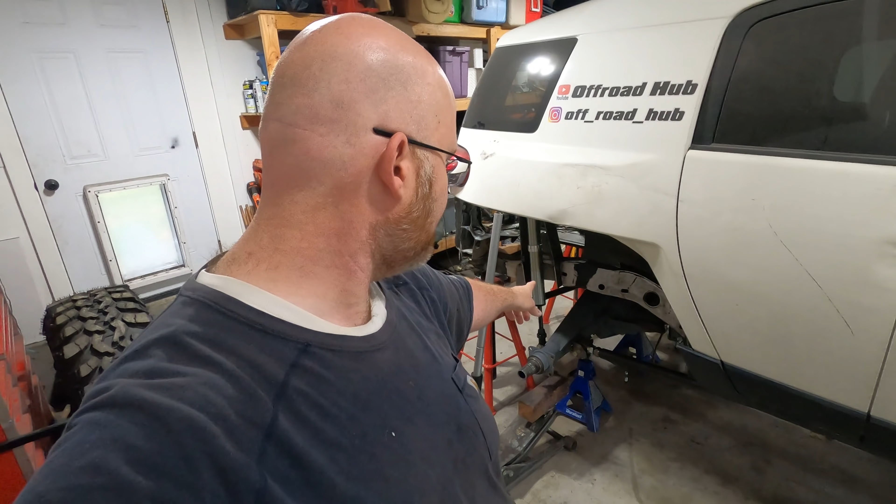And then also, here are my new oil lines. When we get done with the main thing I'm gonna talk about today, we'll talk about those oil lines, and I'll show you my rear axle. It's now movable, it's off the jack stands. Well, it's on the jack stands right now, but we can take it off the jack stands and I'll show you how it moves.

So I've covered a lot before about my snorkel and the issues that I had with the ARB Safari snorkel. I put these big holes in the fender, and it kind of dented up my fender because I dragged it and hit it on things. Anyways, the intake is right here behind this hole. So this is the factory intake that I reinstalled. If you look up in here, you can see that's where all the air goes in.

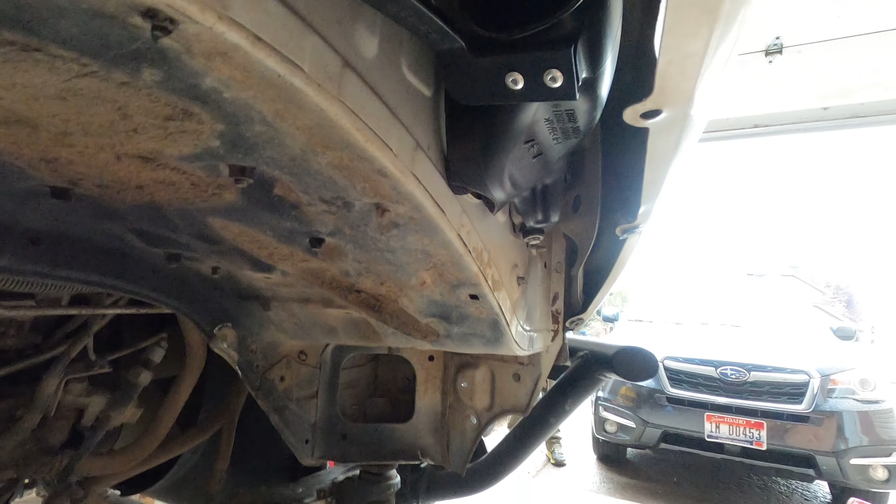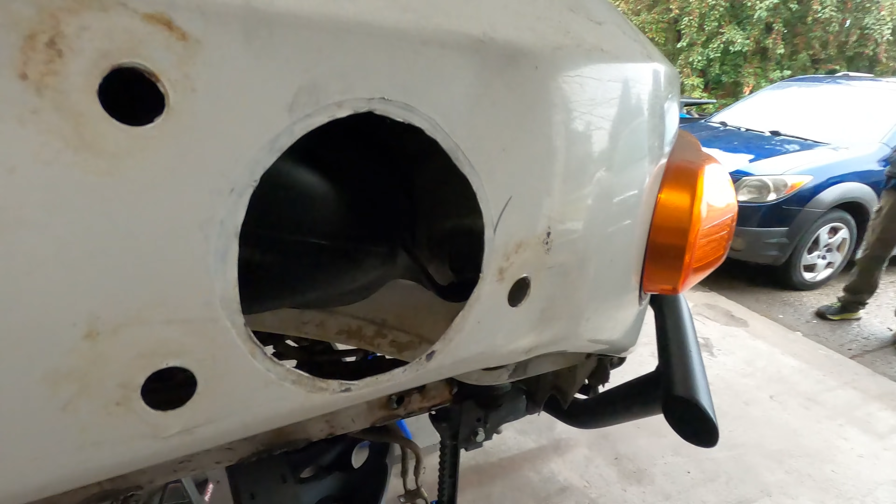With my solid axle swap, I'm not going to have any plastic liner here, so all the dirt and mud is going to go right up here directly into the intake. So that is not going to work. So I've been thinking about and trying to figure out what I want to do for an air intake. I didn't want to put on the Safari snorkel again just because I don't like how it's out here on the outside of the fender. It just seems to get in the way too much.

So I went on eBay and I've got this box that came all the way from Kazakhstan. This is one of those low profile snorkels that goes under the fender and then up on top of the roof here. So yeah, let's open up this box and see what we got from Kazakhstan.

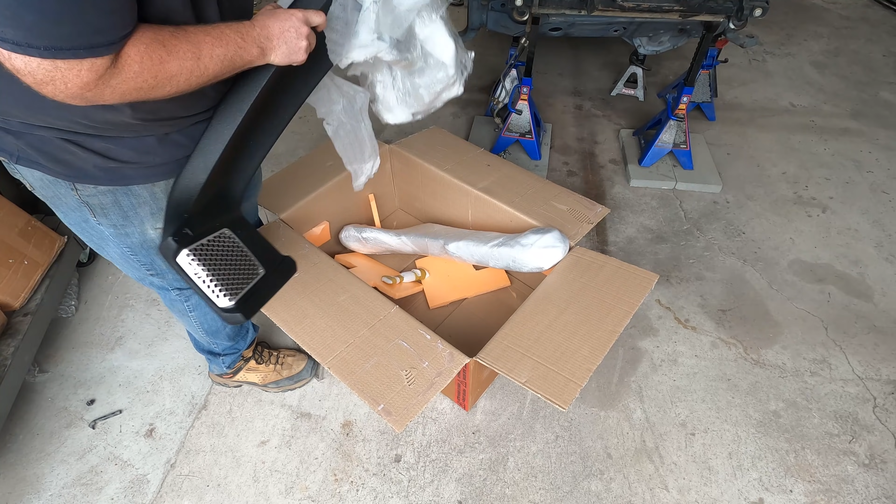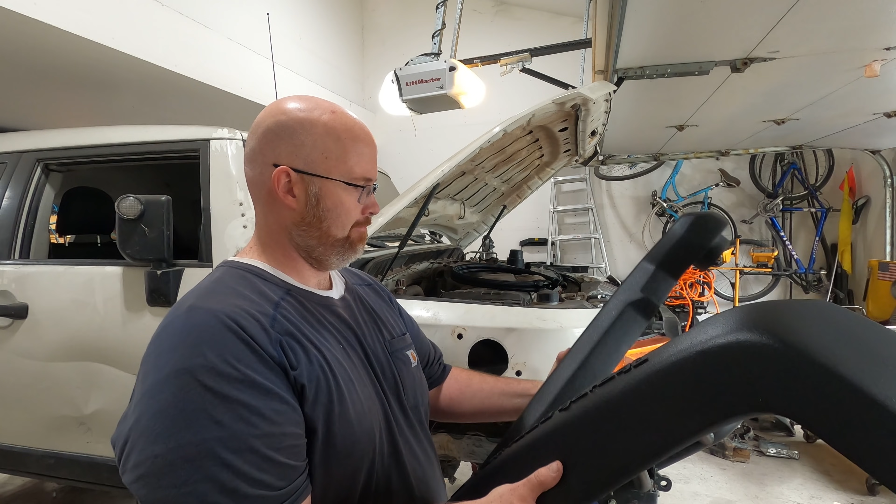So there's not much in the box, just these 2 big plastic pieces. The piece that goes under the fender here, and then the piece that goes up on the roof. And they've got their company name here on this piece. It's called Offroad Garage. So yeah, this is the Offroad Garage snorkel. They're not called Offroad Garage on eBay, I'll have to look and see what their name was on eBay. It wasn't that, but yeah, Offroad Garage.

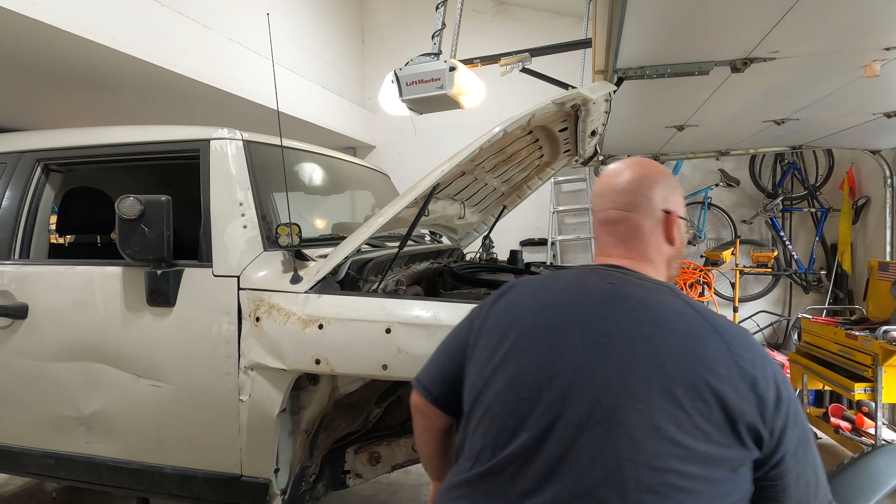Other than that, the only thing that came in the box was this hardware kit with this bracket and some screws and washers and stuff. No instructions. I'll have to go online and see if there are some instructions. It's probably pretty self-explanatory, but I gotta see if there's some instructions.

All right, I don't have any instructions to print out, but we found them online, so we'll just look at the laptop and reference that as we tear into this thing.

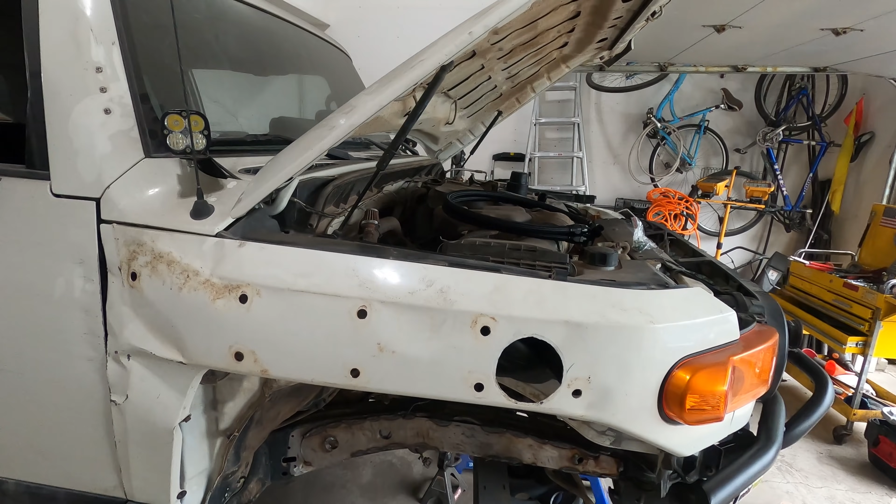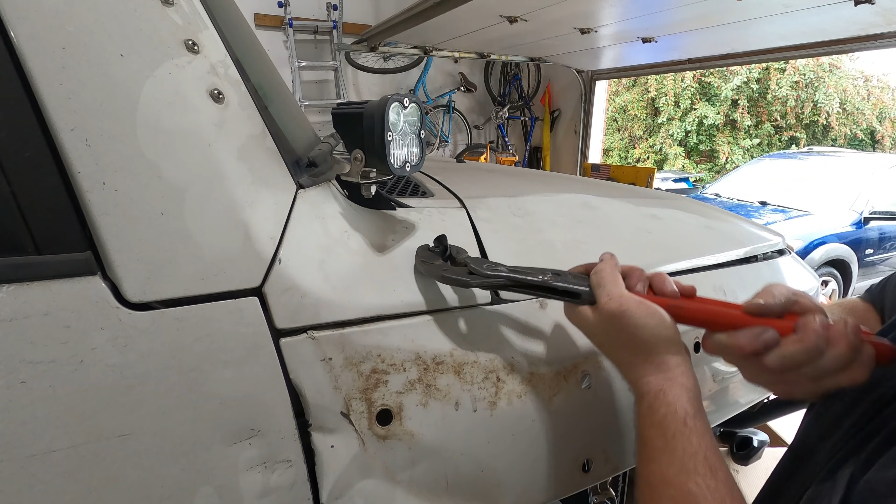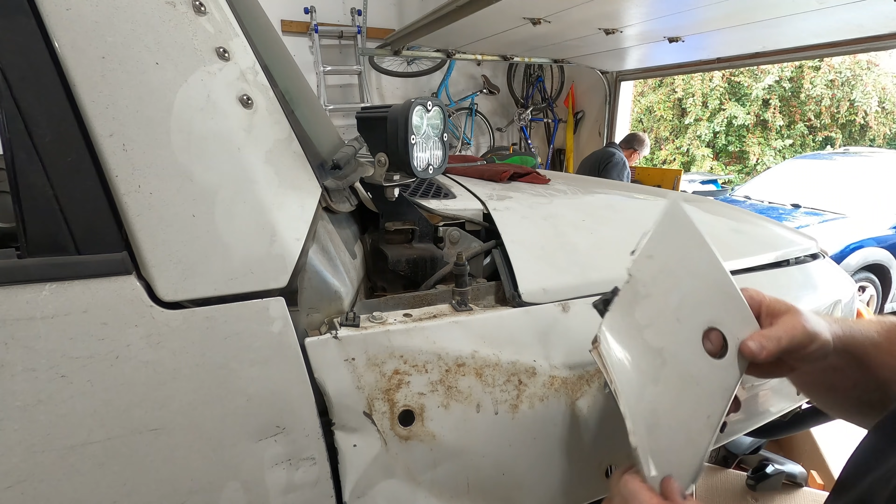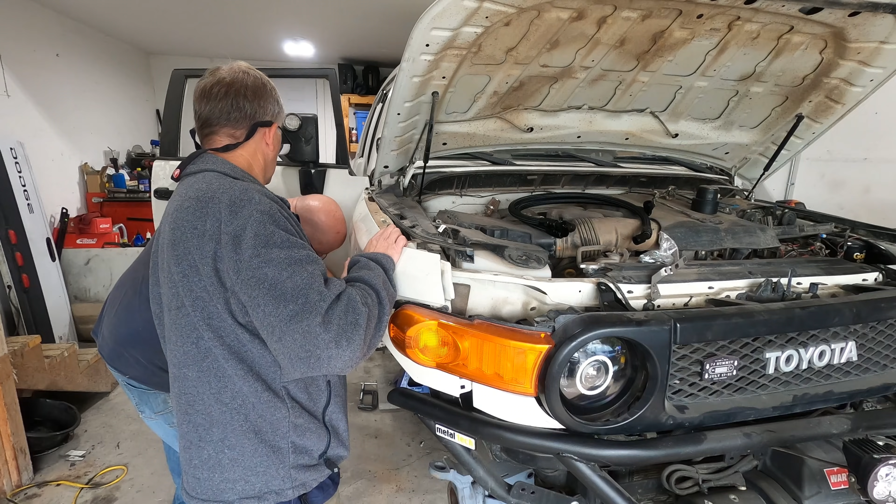So I gotta get this antenna out of the way, and then I'm gonna have to take this panel off, and hopefully I don't need those clips that hold this panel on, because you know those are gonna break. Oh, big surprise, my antenna's not totally straight. I think this thing just pops off here. With some difficulty... there we go. Those are really stuck on. These plastic clips - this one didn't break, and this one did, and these ones did as well. I don't know if I'm going to be reusing those or not though, we'll see.

There it is, so now you can see even better. Here's the intake, and the wheel's going to be right down here, so that's obviously not good. All right, so when you order a snorkel from Kazakhstan, you don't get really any instructions. It's pretty terrible instructions.

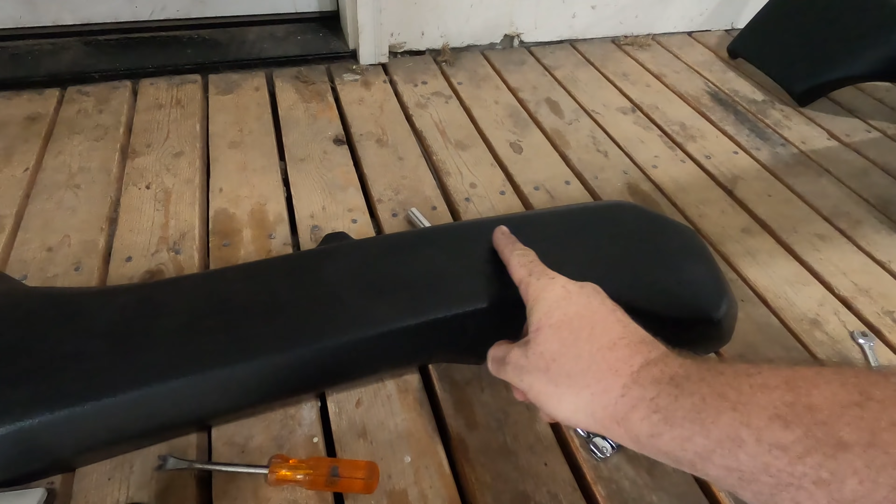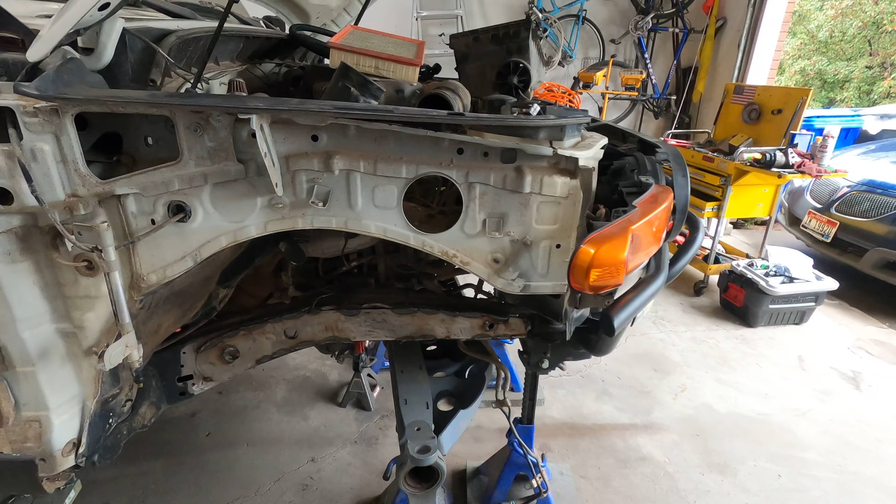We got to drill some holes in this somewhere and put these brackets onto that, and then bolt those brackets up to here somewhere. I need to remove this. It doesn't say to do that, but it's obviously in the way. So this is supposed to, let me see here. Trying to hold the camera and the snorkel at the same time. This is supposed to go up here like this, but this little piece of metal right there is in the way. And then we got to try to figure out how to get it bolted up there with the little brackets they provided.

The instructions just say apply sealant to junction connector and inlet air openings. It has little arrows and stuff, but it doesn't actually show you where they go. And the instructions seem to be translated from Russian, and they're not very detailed at that. But we're gonna figure this out. I think we're gonna remove this and then just kind of engineer this and figure out how to make it fit.

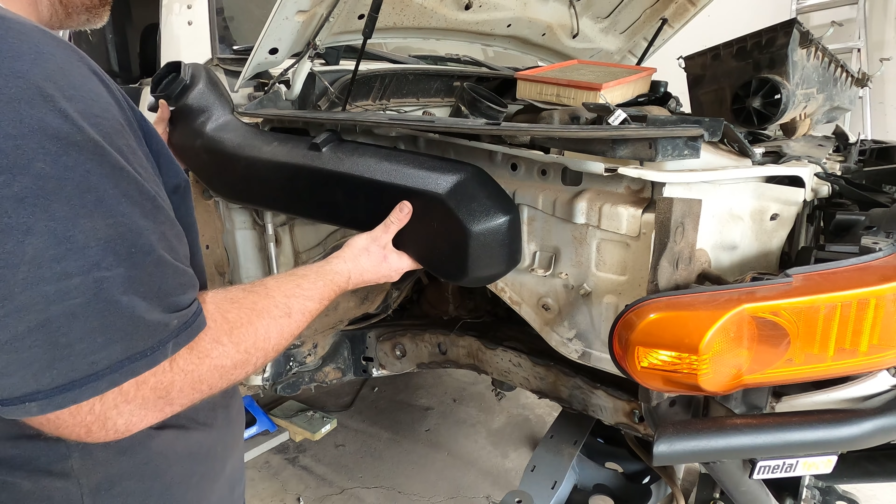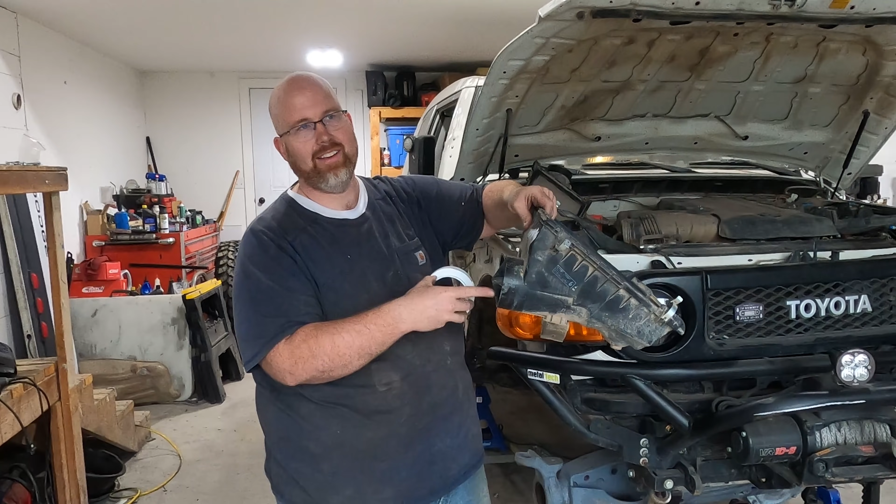Okay, that fits in there tighter now. So here's where we're at with this thing. Getting it to fit is no small task, let me tell you. Ken and I went to the hardware store and we picked up this PVC reducer. There's a 4-inch intake on the box here. The thing from the snorkel is a 3-inch. And that door just blew open.

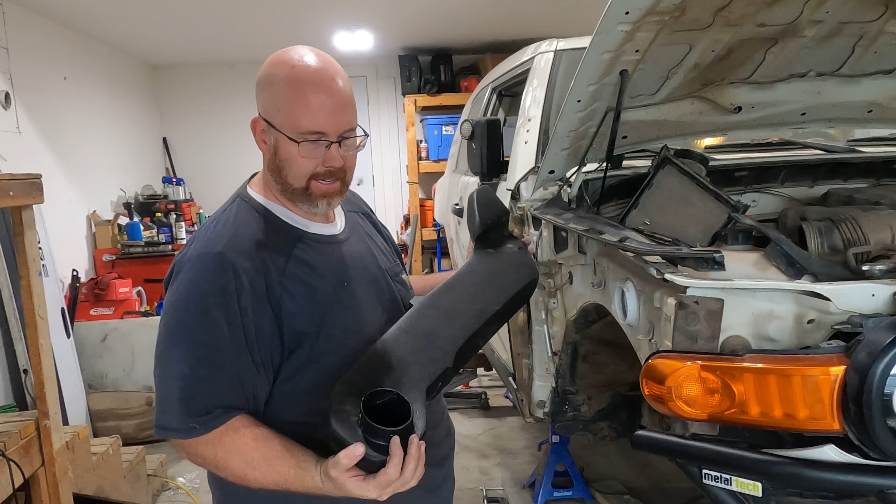So now that fits on there pretty perfectly. And I put the air box in here like this. There we go. You can see that it sticks out there nicely. And then this piece right here, it goes right on here, just like you'd expect. It locks into the air box, just like you'd expect. And it looks like it fits up there pretty well.

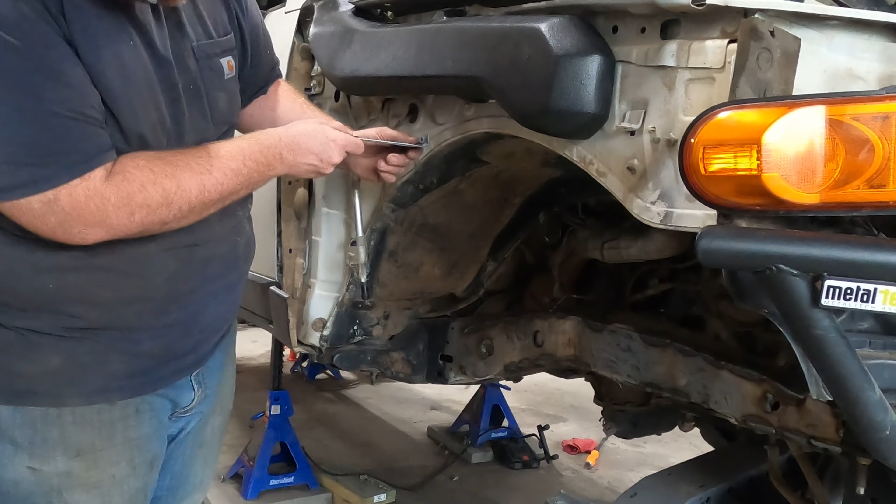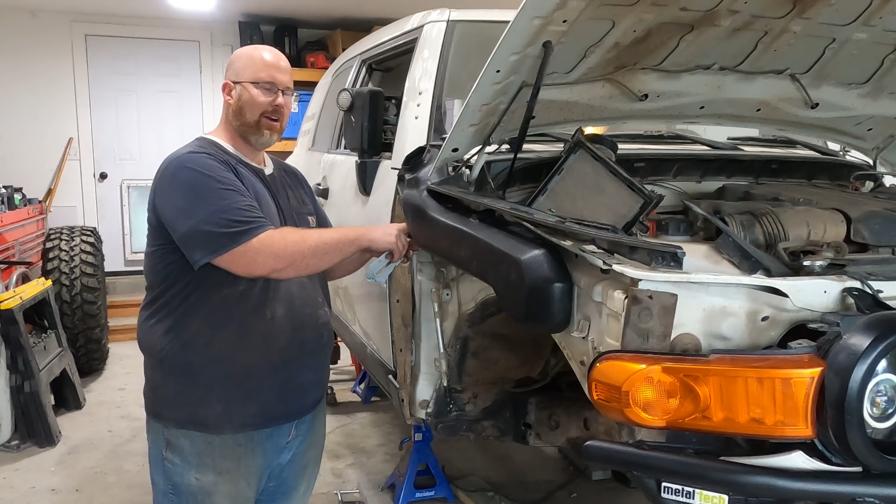But in reality, there's really nowhere to bolt it down. There aren't any holes in this right here. So we're gonna have to drill holes and then make up some brackets to go into made up spots on the body. There's just nothing here. It's kind of crazy. So what we're actually gonna do is reuse this bracket that we took off of here. We're gonna repurpose this and mount it, since it's got a nice weld nut right here, we're gonna mount it right here and actually use this as a bracket to support this. And then we'll figure out also how to put another little bracket right over here.

But other than that, there aren't really any real instructions, and so we just gotta kind of make this up as we go.

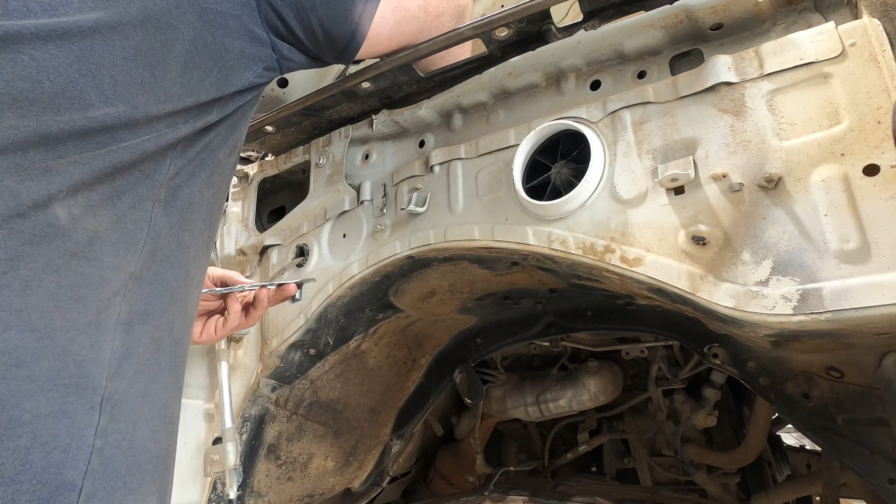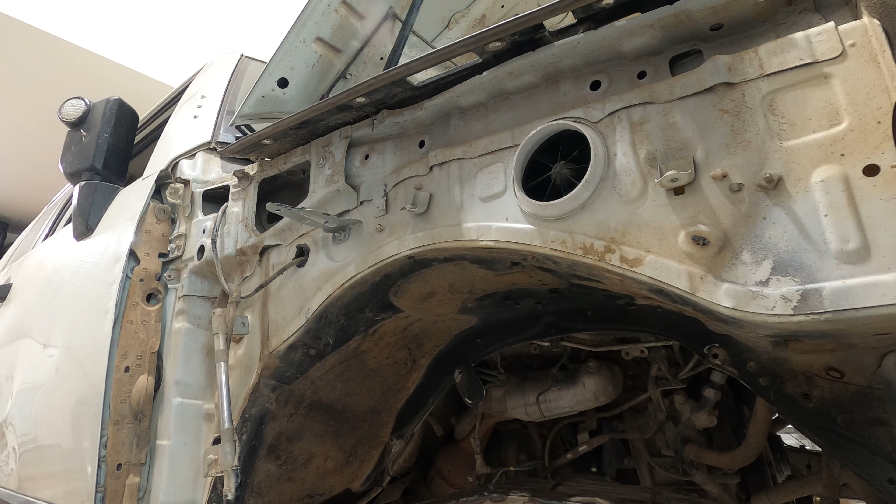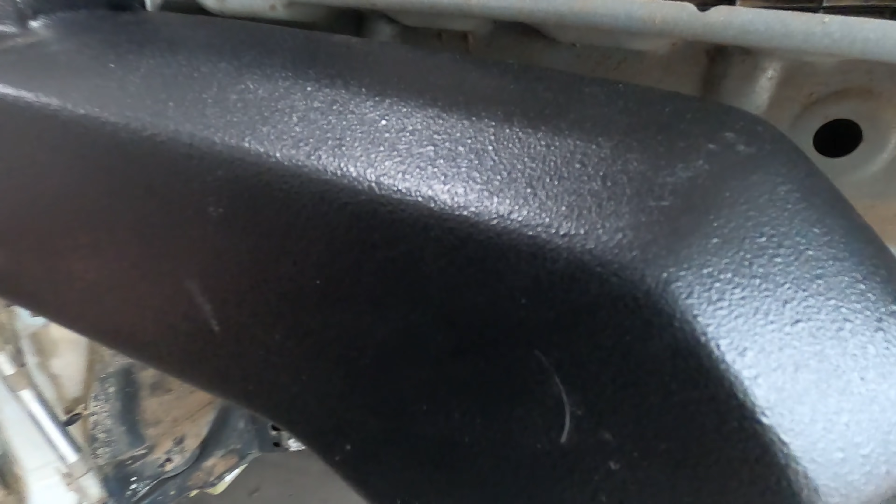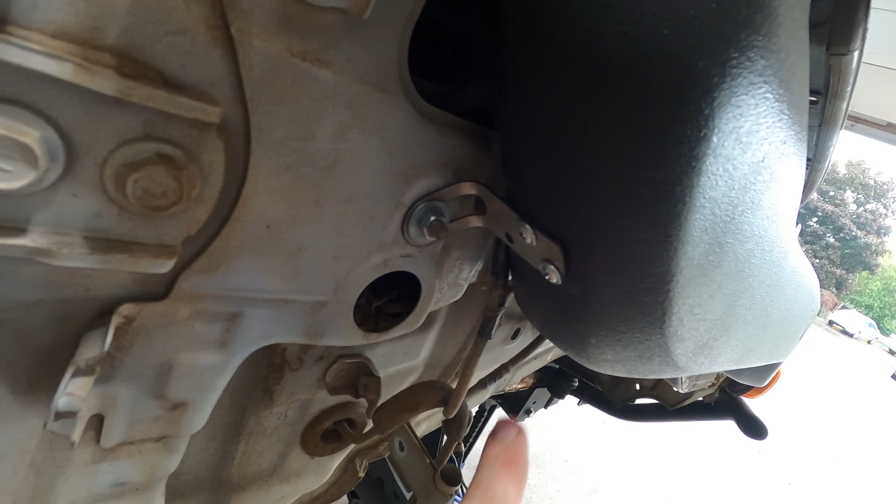There we go. All right guys, we're making some real progress here, but it's definitely a challenge. Here you can see it's plugged into the airbox, and then we've got our repurposed bracket under here, bolted under the body, and then screwed into the snorkel. And then over here, another bracket bolted up to the body and screwed in. And so it feels really solid now. It's not going anywhere. This is the part that goes under the fender, of course.

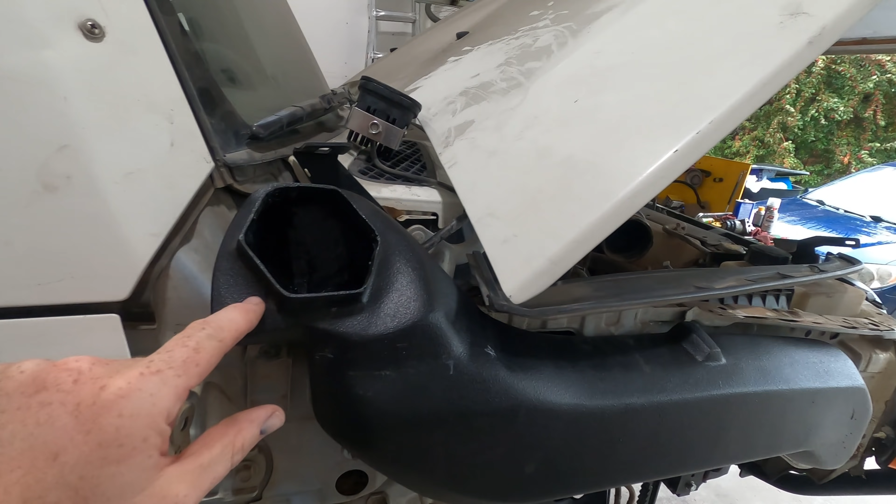So now we have to get this part to fit on there, which is going to be no small undertaking, because the part that mates up to this on the top part turns out to be quite a bit larger than this. You would think, since it's this shape, it would all fit together, but it doesn't. It's much larger, so we have to find a way to seal this. Also, I'm going to have to do something about this light bracket. I think we might put some spacers on it. That was Ken's idea, to raise it up to get it out of the way of the top part that goes right here.

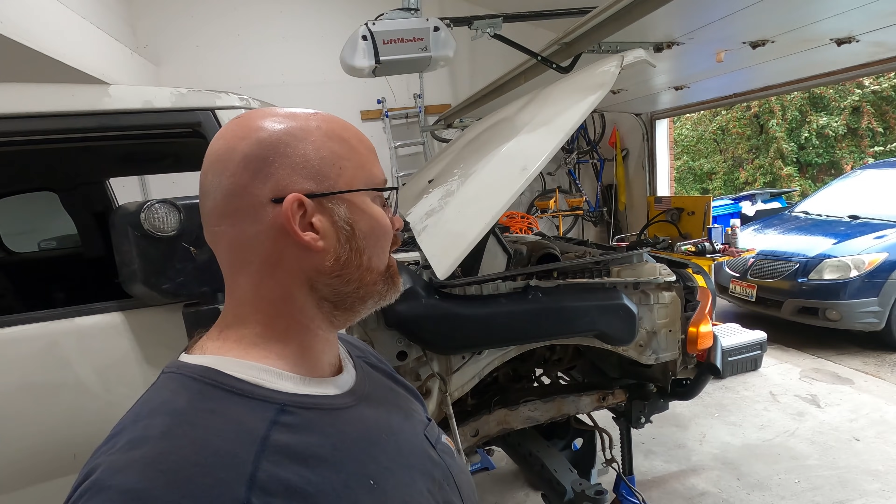We will figure this out. To get to this point, we've spent a few hours tinkering with this thing. So it's definitely not a bolt-up kit that I'd recommend for most people to do, honestly. But I did need a solution to get air out of this, to not have air coming in right here. That's obviously, I can't do that. That's no good. So we're making progress, and we'll see how it goes.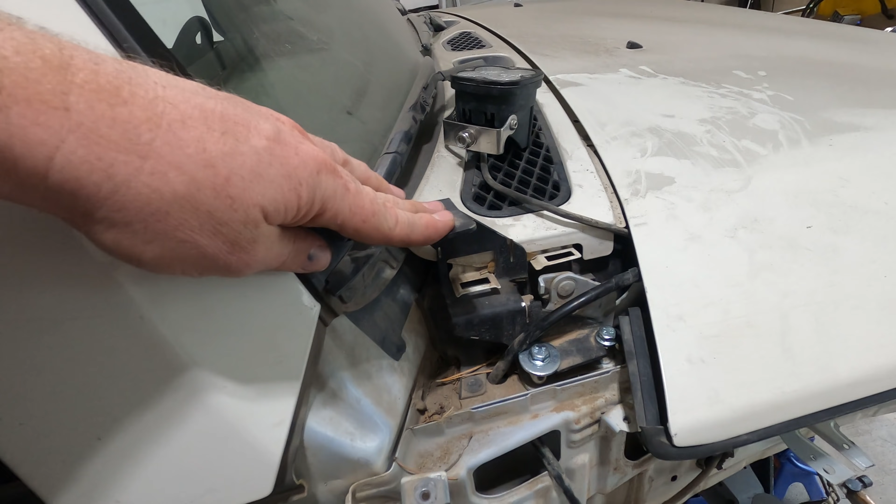All right, I've got some spacers installed under here, so this light bracket is a lot higher now. So I think this part of the snorkel will fit under here, and it'll come up here. And I don't have a roof rack. I have these caps that cover where a roof rack would mount. I had to wipe this dust off because this is all grinding dust up here. Anyways, so the snorkel actually ties into this mounting point up here. So yeah, we'll see if we can make it fit.

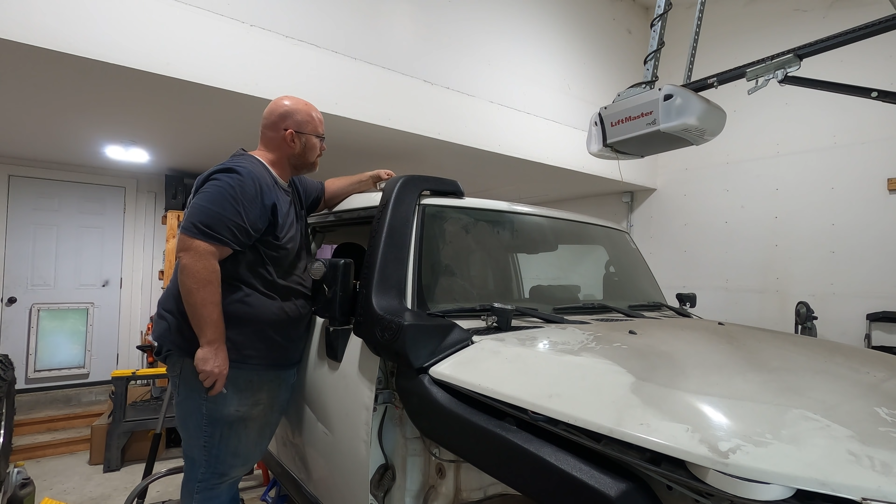All right, Ken and I were so close to getting this thing installed, but we've definitely found some issues, and I've contacted the eBay seller to try to figure out a resolution. Hopefully he responds very soon.

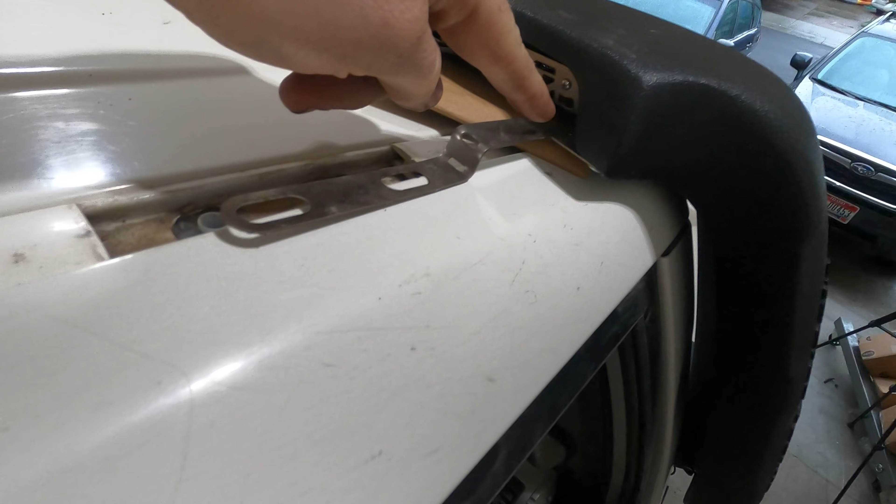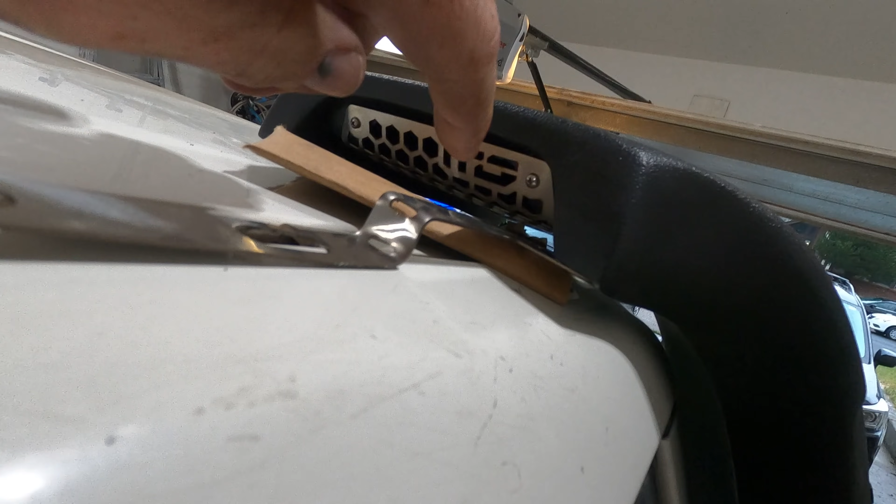So the issues are, let me go up to the top here and show you. This bracket is supposed to bolt into here, and it attaches to the top of the snorkel right here. But if I pull this over and attach this, nothing fits. And there's little screws on the bottom of this snorkel head that hit the roof and scratch the paint off. The way this is designed, it is literally impossible with what came with this snorkel to hook it up without scratching your roof.

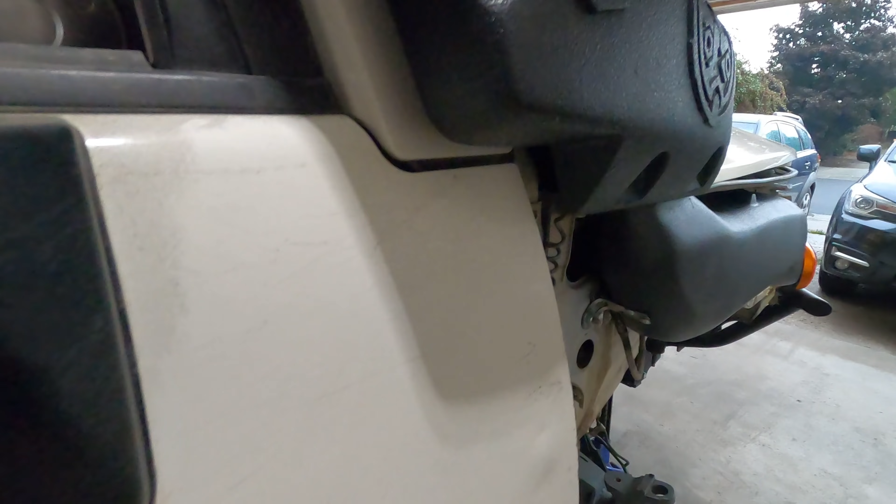And besides that, if I pull this over and bolt it down, which I did earlier, all this gets popped up and out of kilter, and you can't open the hood anymore because it hits this.

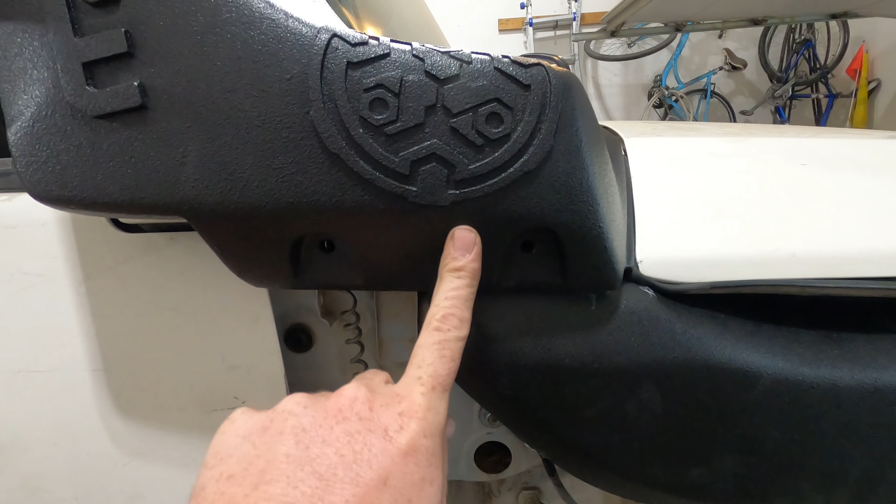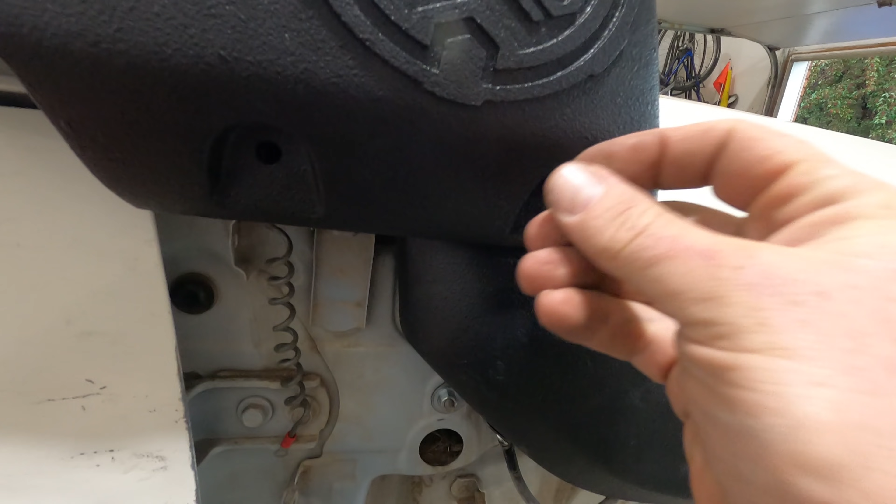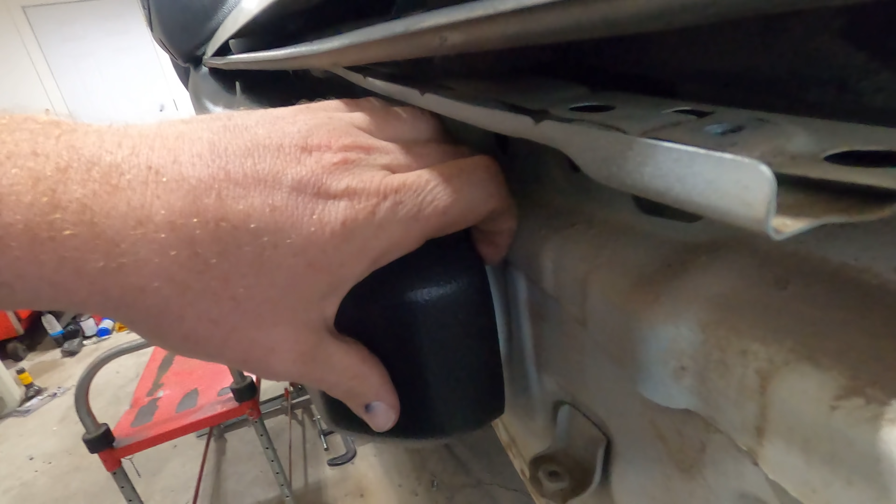We stuffed some weather stripping foam in there, and it kind of almost sealed, but really cheesy, and for the price of this snorkel, unbelievable lapses in quality. Not to mention, where it connects to the airbox is a 3-inch opening, where the airbox actually has a 4-inch opening. So you have to get a reducer, which is not included—you have to go buy one from your plumbing supply. Why? How does that even happen?

Anyway, so I've contacted the seller, and I'll let you know what he says. Like I said, Ken and I yesterday did a bunch of work on the rear end of the vehicle, and right now I'm going to show you what we got done back there.

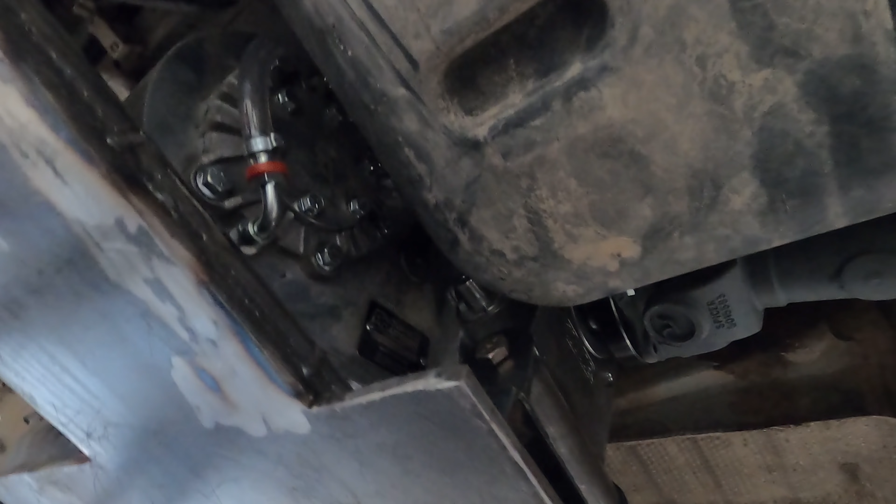So we got the rear drive shaft installed—that's not permanently installed, but it's in place. And also you can see the gas tank is in place. There's not a ton of clearance between the gas tank and the Atlas, as you can see. That was a point of curiosity for me, and probably for other people interested in putting an Atlas in their FJ Cruiser. But there's plenty of clearance on the drive line, so it's not going to hit the gas tank.

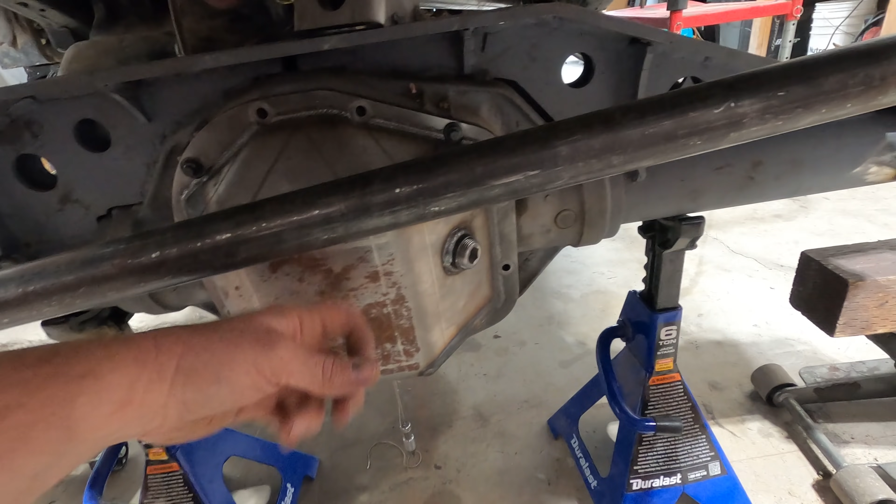And we got a panhard bar mount over here on the axle that I'm finally pretty happy with. That's going to be great—goes across there, looks good. I put on my Ruff Stuff Specialties differential cover back here, made of 1/4 inch steel. I wanted to get that on there so I could be sure my clearance was fine with the panhard.

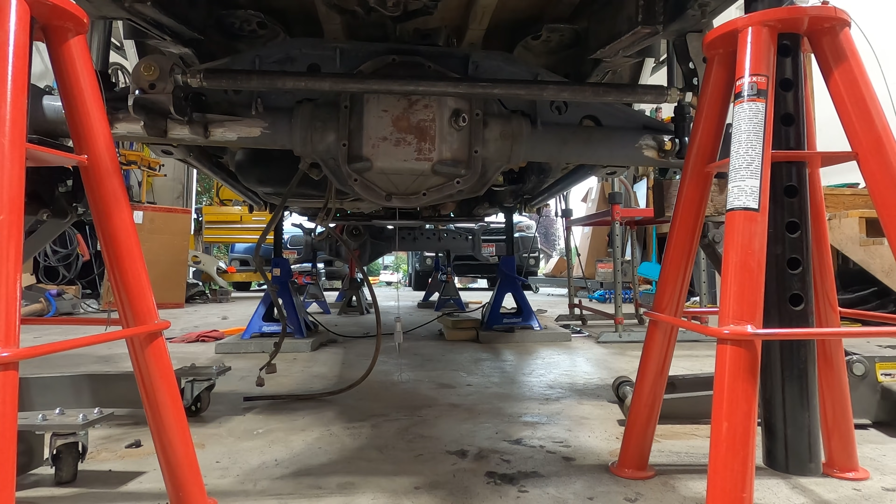And the axle goes up and down now. Let me show you that. So there you go, it goes up and down. Pretty cool, huh? I'm pretty stoked about that. To have that axle be able to do that, that's pretty exciting.

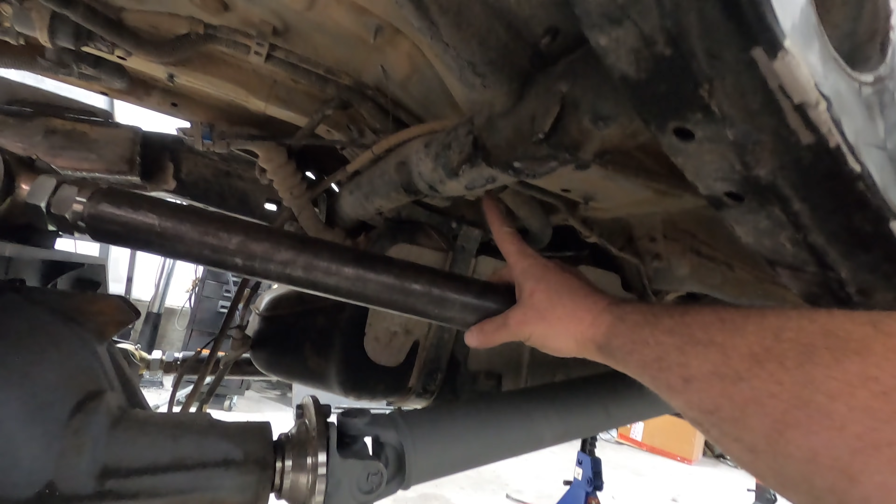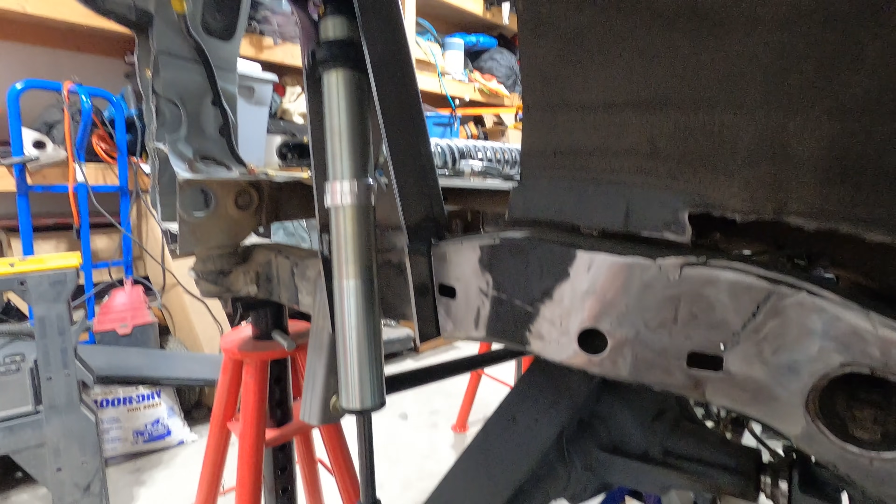There's no interference except for when the entire axle is jacked all the way up. This third link gets close to this frame piece here and leaves about an inch or an inch and a half of up travel wasted on this side. But that doesn't happen when either side is all the way down and the other side is all the way up—that only happens when the entire axle is lifted all the way up, which probably won't really happen much while I'm driving. So I'll have to put some bump stops right here. Pretty minimal. We got, for all practical purposes, basically all the travel out of these 14-inch coilovers. So that is pretty awesome.

So I've decided with this snorkel that I'm going to take it off. It's unacceptable—the lack of quality is completely unacceptable. This is not going to stay on my vehicle.

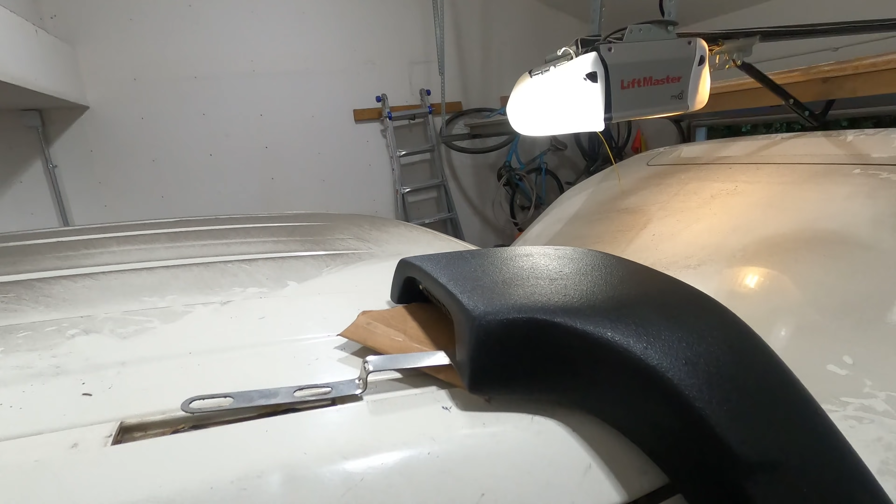Let me just take you up to the top again, just to remind you, this is the bracket. If you connect it, it's gonna scrape up the roof. It already did, actually, because there's screws on the bottom of it.

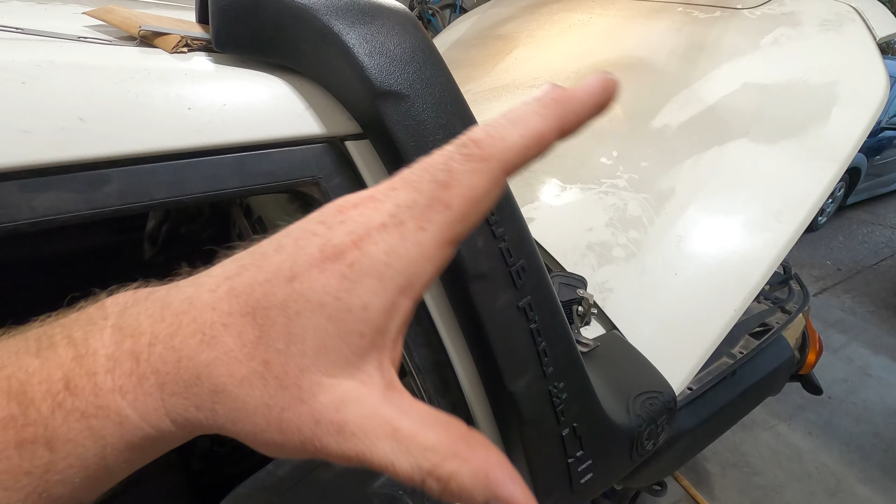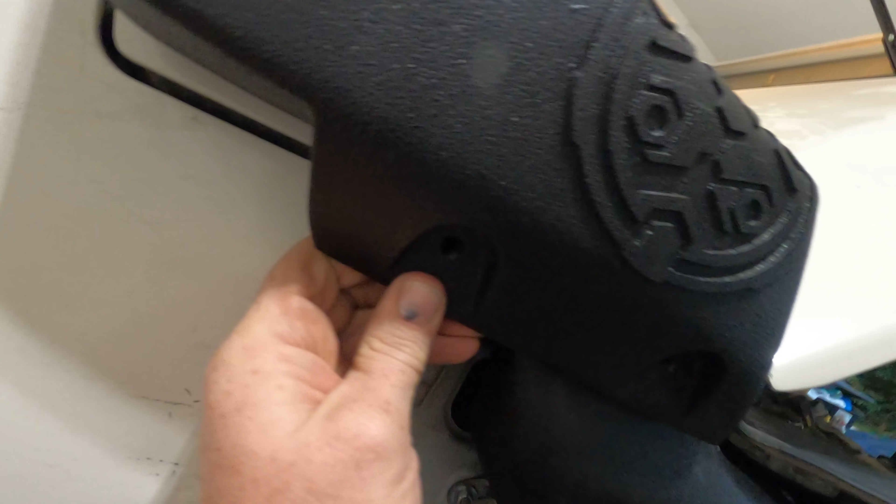Now, I contacted the seller and he said rotate the snorkel clockwise and you can raise this off the roof. Well, that sounds great and all. But as soon as you do that, this hole that you're supposed to put a screw in and hold these two halves together, it doesn't line up with anything.

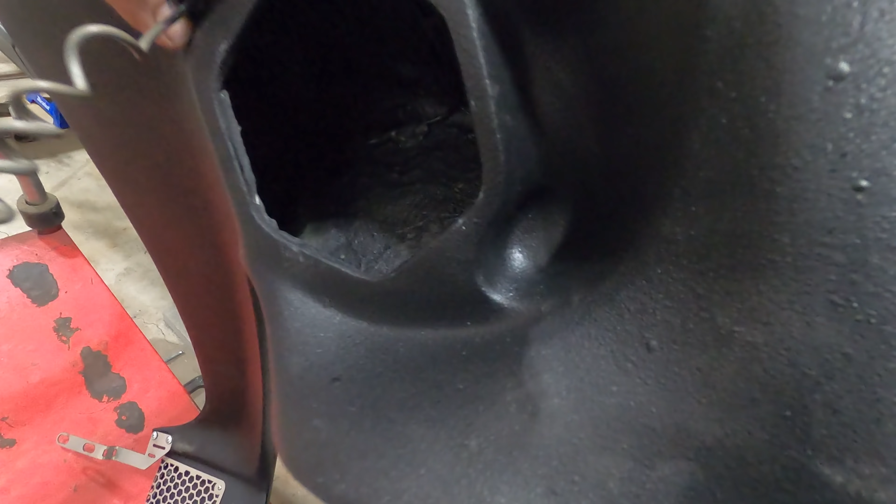It's empty space back there, so you can't put a screw in there. So let me lift this off of here and show you one of the more systemic failures of this snorkel, is this connection right here.

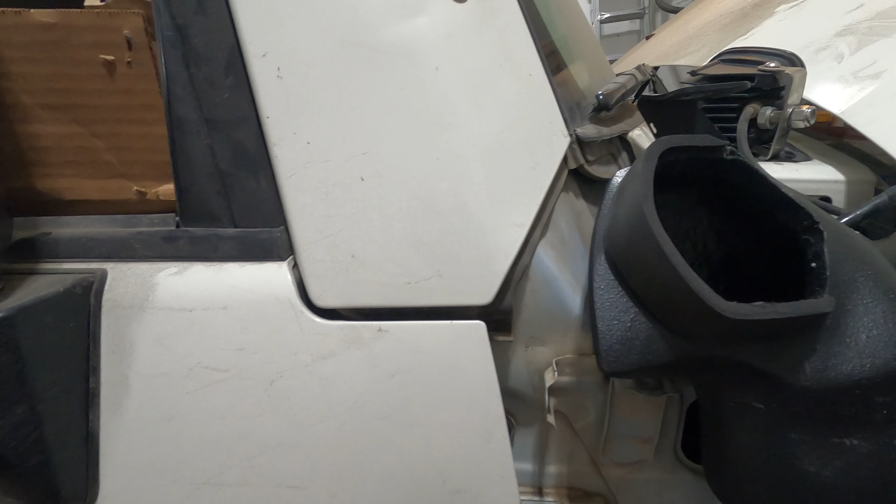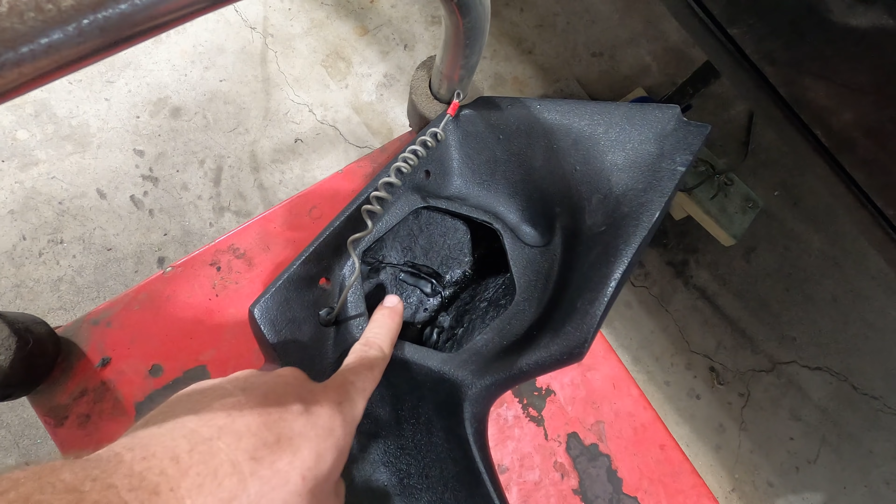We put some weather stripping on here in some kind of futile attempt to get this to seal, because this opening right here is much smaller than this opening right here. I don't know why it's this strange shape.

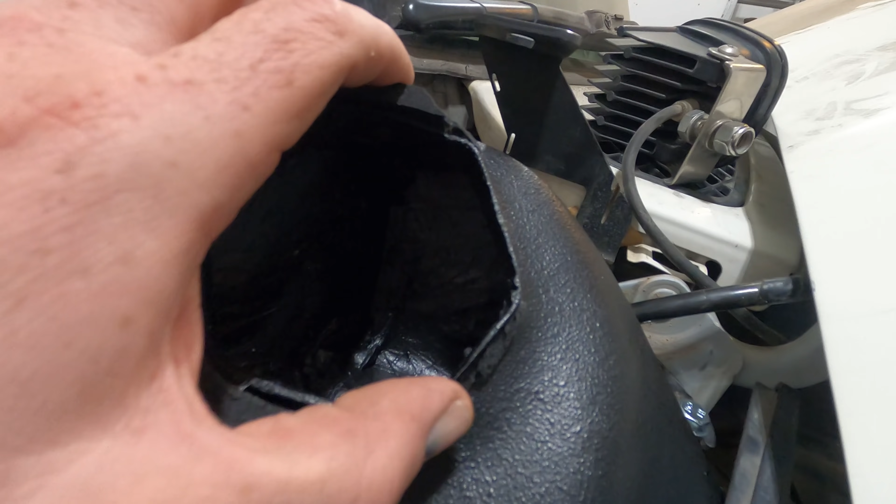It doesn't accomplish anything, but there is, I don't know, a solid half inch gap all around this when you try to hook it up here. So I don't care how much silicone you put on here, this part is never ever going to have a really good seal. And since you can't connect it there, I don't know what's going on here. Totally bad.

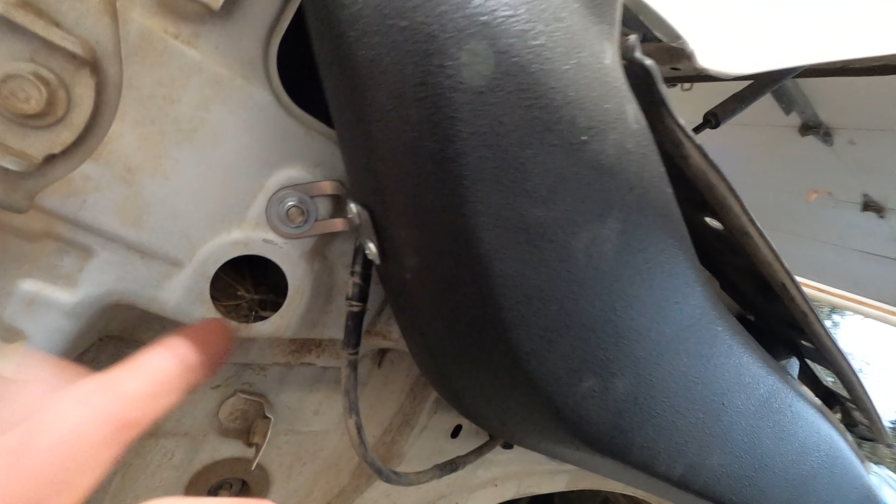Let's see, the custom bracketry, it's okay, but this is really thin fiberglass, this material here. So these screws are screwing into this material, which is probably at most a couple millimeters thick. So if you unscrew these and put these in repeatedly, or over tighten them at all, or put any stress on them, these screws are not going to be able to hang on to this really thin fiberglass material.

And then the final problem, major problem with this snorkel, this where it connects to the intake, that's 3 inches, and the intake is 4 inches. So I had to go to the hardware store and buy a PVC reducer, which I had to modify to get this to even fit on there.

For one thing, why are we reducing from 4 to 3 inches? And another thing, in the description of the product it says it comes with the adapter to go to the intake, but it doesn't. You've got to go to the hardware store and buy something to try to make it work.

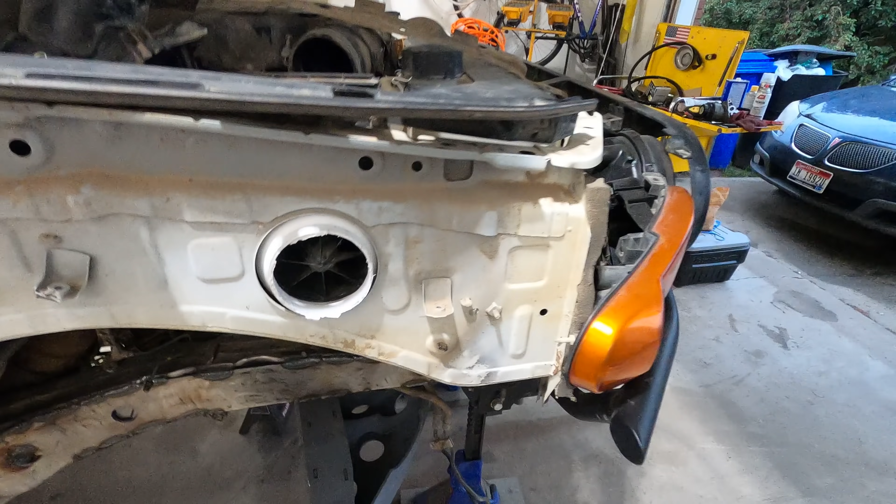Let's see, is there anything else, Ken? Any other problems with this thing that I didn't mention? Yeah, it's just, the seller saw my bracket here and tried to blame the whole thing on the fact that I have this bracket here, but this wasn't in the way of anything.

So yeah, the off-road garage snorkel for the 2010 plus FJ Cruiser. I'm not negative on products typically, but you know, after you pay for shipping from Kazakhstan, $600 roughly, that is not a $600 product. That's something I would expect to be $100 maybe on eBay, but it's just horrible all the way around, and I wouldn't recommend getting one.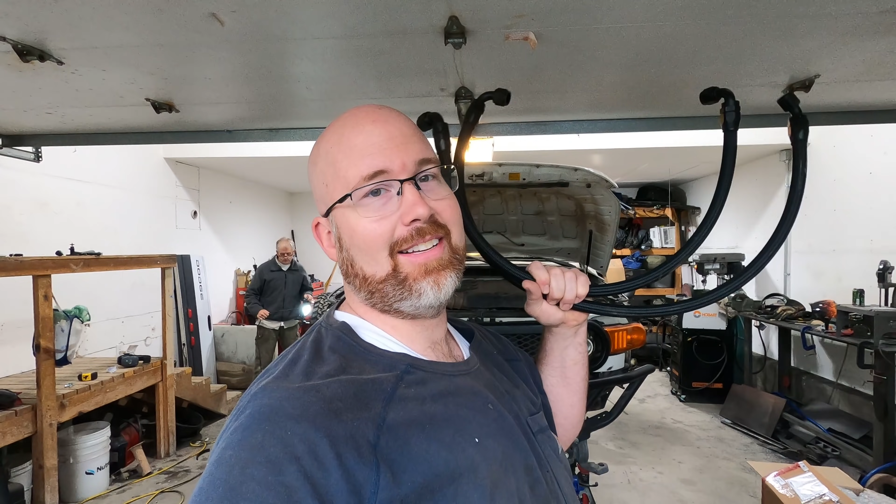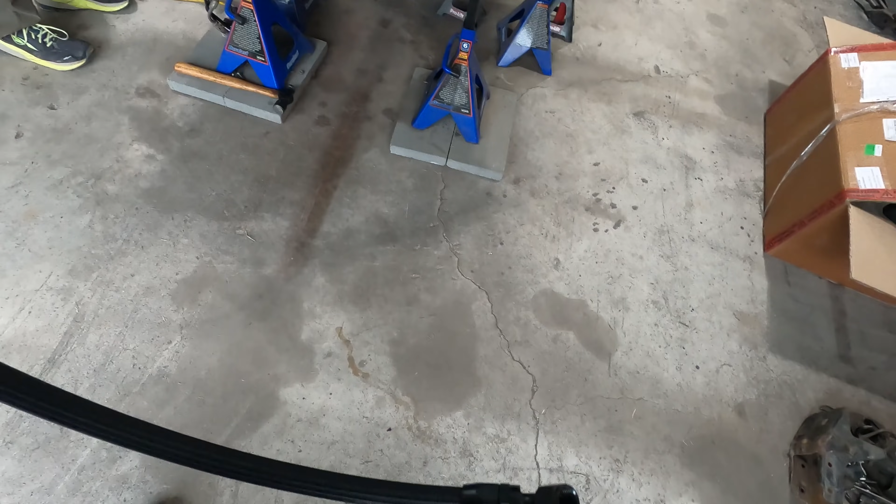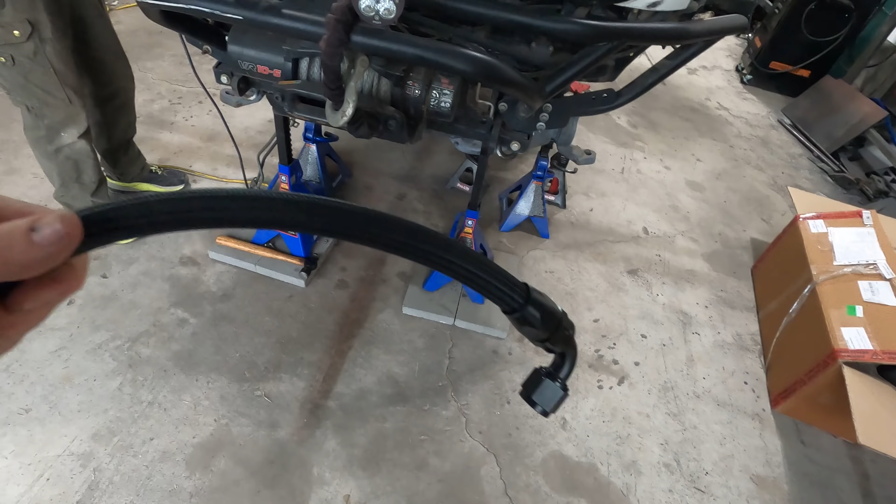So, other than the snorkel, I'm still making good progress on the back there. And then I also got these oil lines, which I mentioned at the beginning of the video, for my remote oil filter. So these are steel braided lines with a nylon braid on the outside with AN10 fittings on either end with different angles. These lines are rated to like 600 PSI, so the 40 to 60 PSI oil pressure from the FJ shouldn't be too big of a problem.

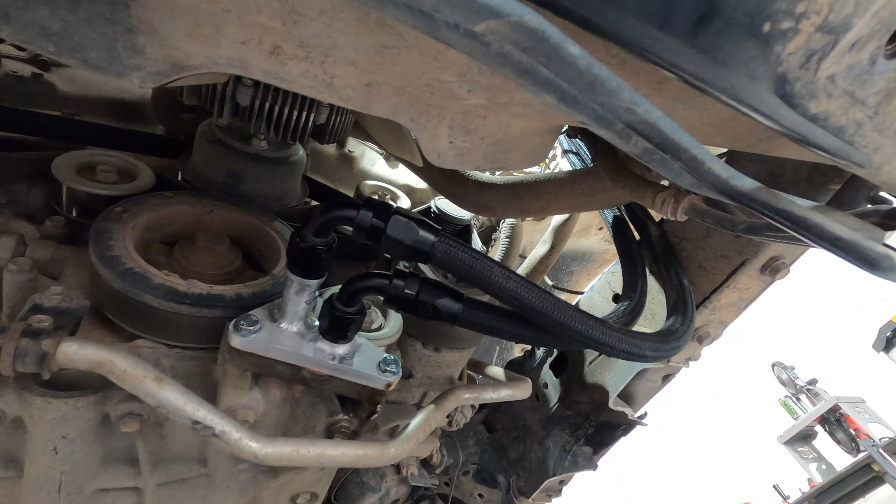And here's what those lines look like hooked up to the filter. Go right down here, and they end up hooked up to the new adapter that I had made, and then go right up to the frame. I'll probably throw some zip ties on those, but it's not gonna hit the fan or anything like that, and it's not in the way of anything else. So much better than the original factory oil filter that was hanging down and in the way.

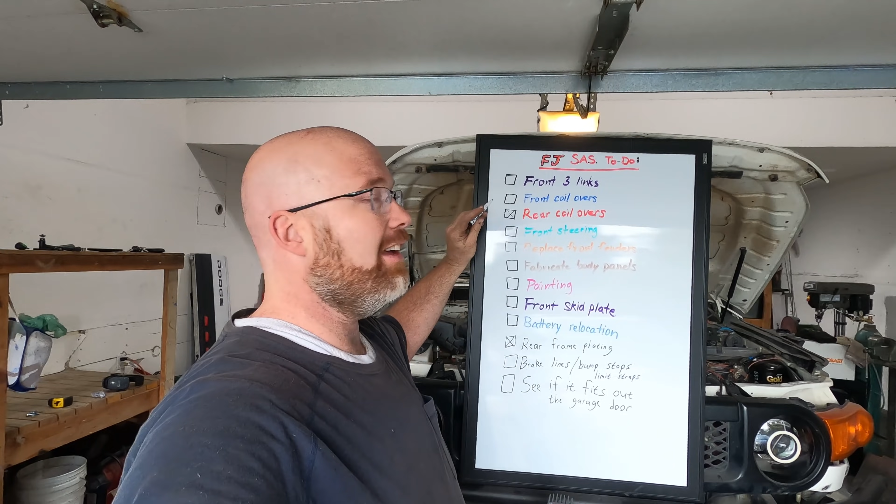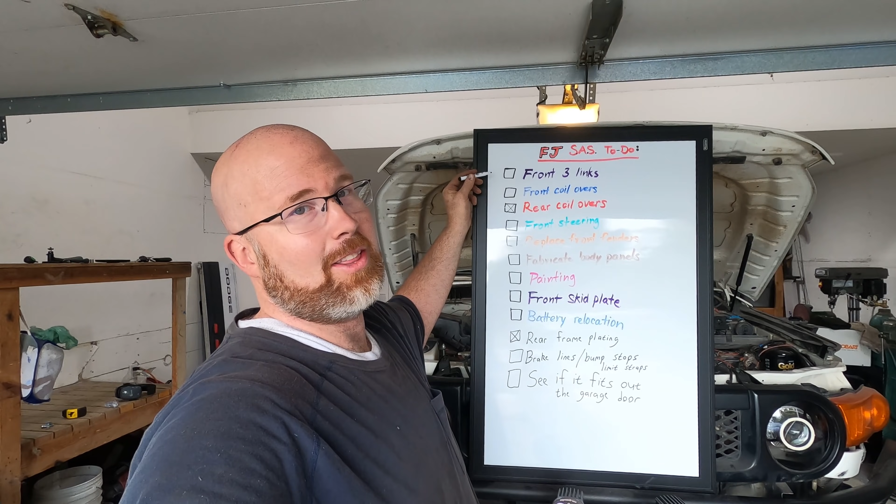Alright guys, I haven't forgotten the checklist that I introduced a few videos back, and we're going to start making some progress on here. For today, we can check off rear coilovers. Those are done. And then on Thursday, you're going to see we're going to get going on these front 3-links. We're going to get the front 3-links going, hopefully have that 3-link done for you by Thursday. And then the rest of this.

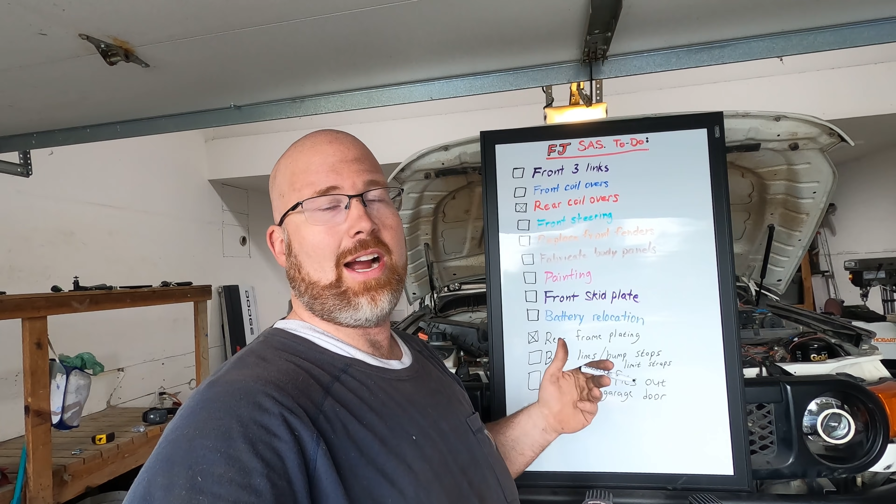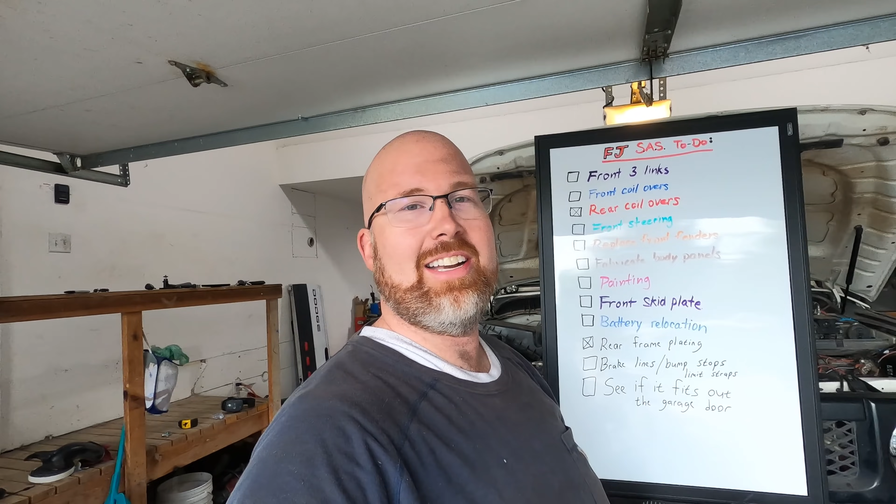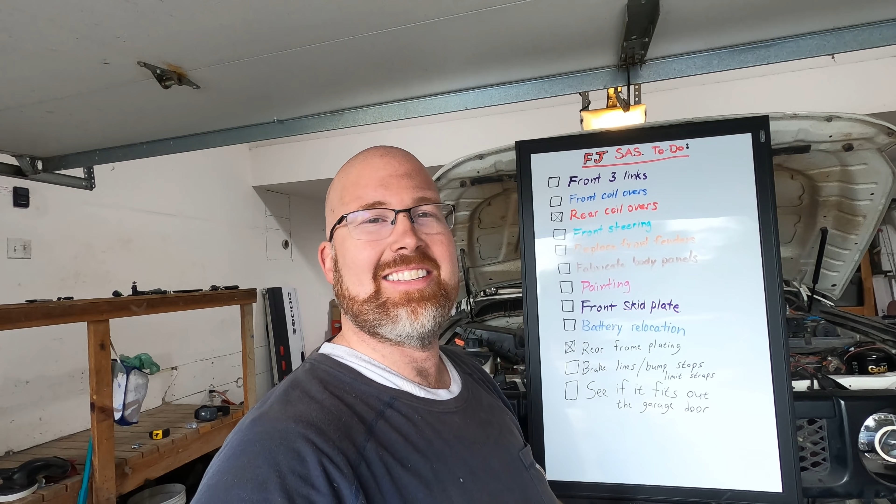Thanks to Ken, he's hiding over here. Coming all the way down from Oregon to give me a hand. He's been a big help. It's great to not have to jump up out of underneath the vehicle every time I need some little thing, and he's even grinding for me. So that's pretty awesome. So thanks again, guys, and we'll see you on Thursday.